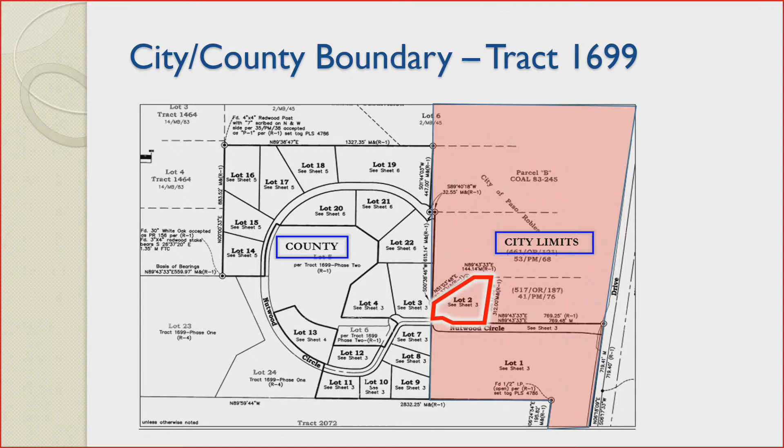So the portion that's in city limits. Commissioner Covarrubias, Warren Frace: Nutwood Circle, that property is owned by the owner of Lot 1 to the south, which has been split into two. It's not shown on this map that way. Do you have the correct exhibit there, Darren? Just so we can see... yeah, go back. That one will work. Okay, so the parcel to the south that's closest to Theater Drive owns Nutwood Circle.

So without a road maintenance agreement or any other agreements in place, the property owner would be ultimately responsible for the road maintenance.

Got it, I appreciate that clarity, Warren. Thank you very much. Last question, I guess, for anybody in staff: have we had any kind of scenario like this in the past within our city where we have a city/county road maintenance issue? Is anybody aware of anything like this previously?

There's a number of areas in town where the streets weren't originally accepted by the city for maintenance, or they're kind of straddling city and county lines. So it's fairly common throughout the town in those conditions to have concerns and issues with long-term maintenance. Okay, I have no other questions. Thank you, guys. Thank you, Commissioner Covarrubias.

Commissioner Davis, questions? Sherry, Darren, correct me if I'm wrong. I really want to see this project go forward, but I'm trying to work through some things. Am I correct that with Mr. Brown putting in infrastructure, those others will benefit from that? I don't know what the cost sharing is, but going first, there's some benefit to the other parcel owners.

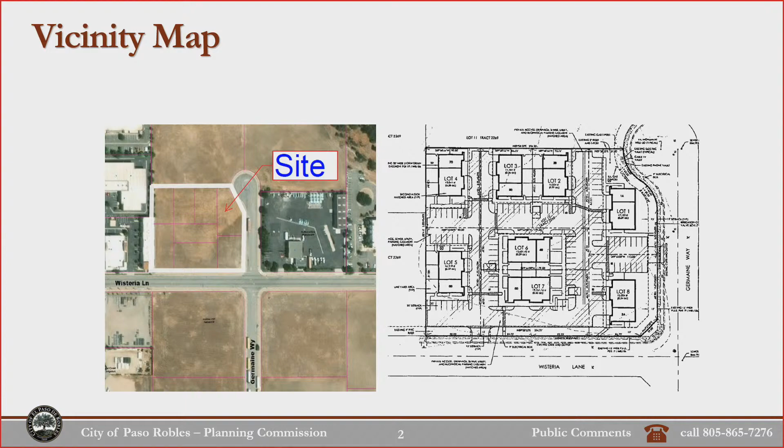No development ever occurred. So when this subdivision went through tract 2269, the streets were put in, the curb, gutters and sidewalks, the utilities were stubbed out. So this is a ready to build on lot. This project never went forward. Again, this is showing the project that was proposed and approved by the Planning Commission back in 2007.

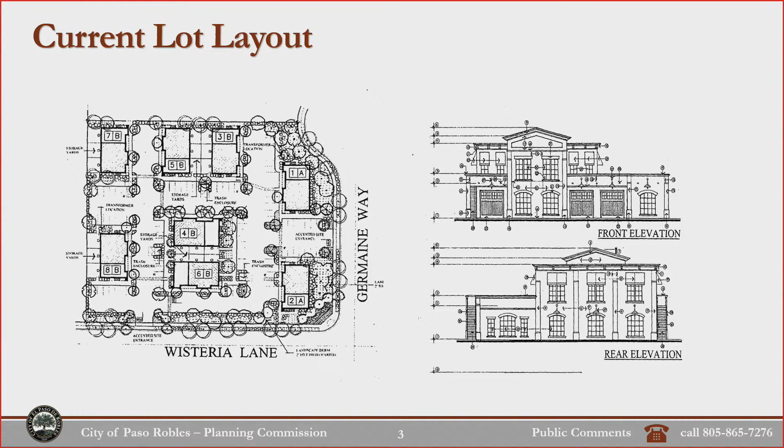So for the Planning Commission's review tonight, we're looking at adopting a new tentative tract map that would reduce the number of lots from 8 to 6. We're looking for a development plan for parcel 1. Mr. Thorndike has a building design that is included in the review tonight that he would like to get approved so that he can move forward with the building of a building on parcel 1.

The intent is to approve the development plan over all 6 lots, kind of a master development plan. There's some design guidelines that the applicant has provided to help guide the development of the other 5 lots in the future as they are sold and as developers propose plans for those lots. So the designs here, the site planning is showing a conceptual building footprint for the lots that could work.

The way that this development is set up, the conditions of approval would be that those lots 2 through 6 would come back, go through a site plan review at the DRC level where the specific placement, parking, use, all of that would be determined at that time. But they would be limited to what they could do on the size based on that property. And we can talk about that a little more as when we get to the site plan.

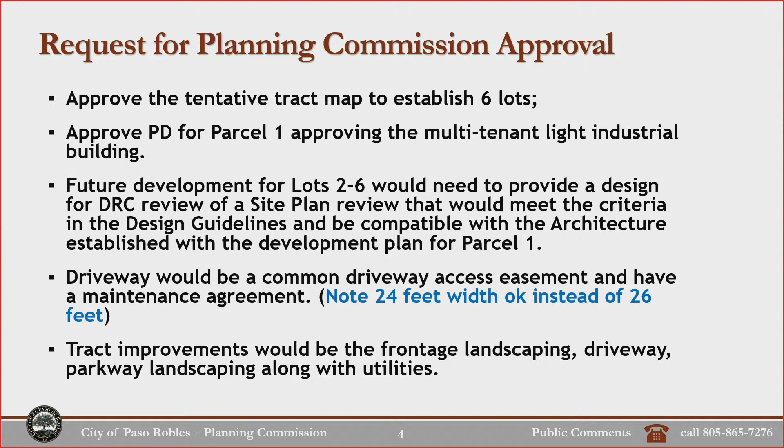There's been questions as this project has gone forward through DRC about how these properties could change, how the site plans could change for the parcel. It is possible that things could change on each of these lots, which would be handled through site plan review. But we know we have a business park, a planned industrial type zoning that allows certain types of uses. What's shown here is more of a standard light industrial warehouse type use.

If there was a situation where we got, let's say, maybe a little delicatessen or some kind of eating or coffee establishment, that is something that is permitted in the zone. That is something that is encouraged, to provide those types of accessory uses to the employees in the area that they could walk to and get those types of things. So we do encourage that.

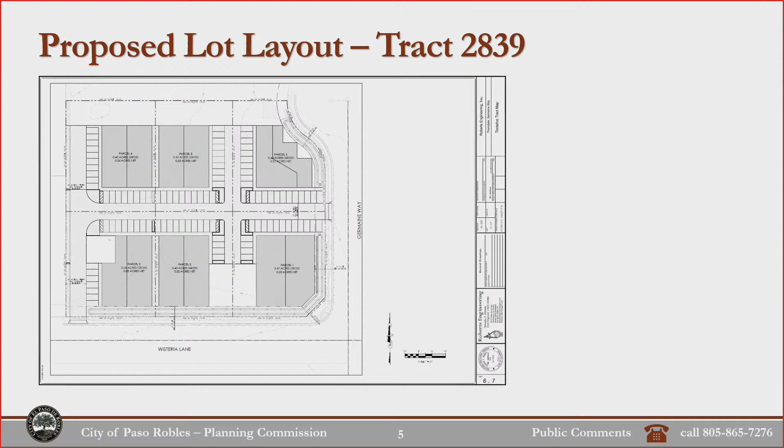So the master development plan shows the setbacks, 15-foot setbacks along the roads. It's showing that the setback area will be landscaped. Some of these setback areas are proposed to be detention basins. We do have a landscape plan that shows how these areas would be landscaped.

Prior to recording the map to create the 6 lots, the improvements that would be completed include completing this interior driveway through and out, establishing the perimeter landscaping and detention for the subdivision, and utilities that would come down the road and then be stubbed out for these lots. That would be phase 1, the requirements for recording the map.

And then Mr. Thorndike is wanting to build this building here. These other establishments, these other lots, would come in as they're sold and folks wanted to propose to build on them. So those would come in as needed, but driveways and utilities would be established.

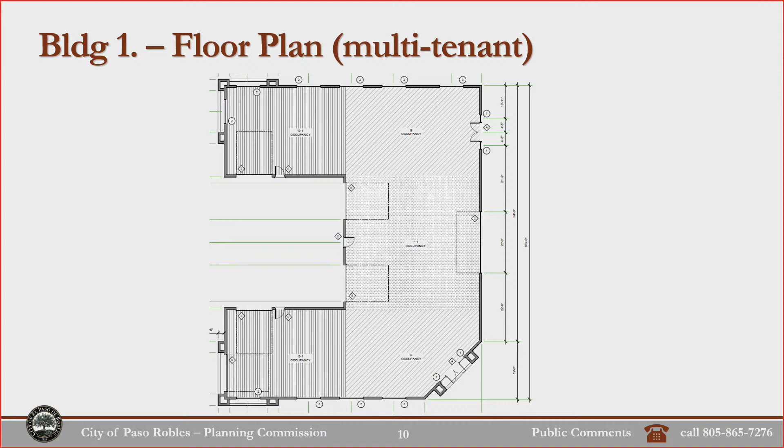Here's some other views of the other sides, and a floor plan showing how other areas could be divided up into tenant spaces—either multiple users with less square footage each, or fewer users with more square footage.

Another thing to mention is this project has existing curb, gutter, and sidewalk. There's a parkway situation, and the phase 1 subdivision improvements would include landscaping those parkways with the project as well.

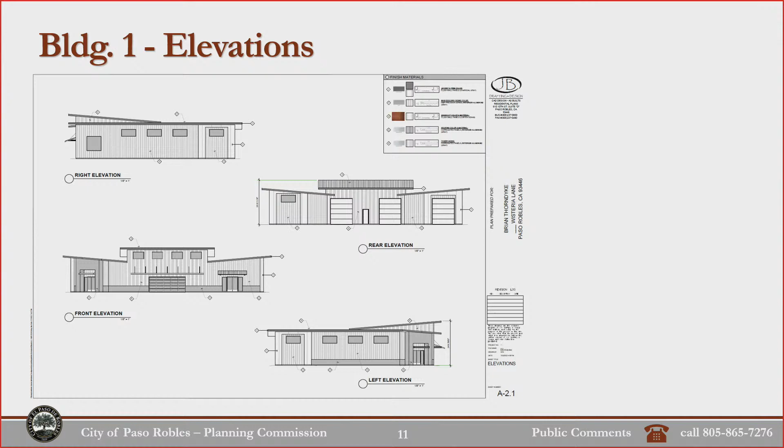Each individual site will have some landscaping, but it's going to be pretty minimal and not a lot to be seen from the public right of way. But the intent would be there's a plant palette in the design guidelines, and it would correspond as each of those lots develop, and DRC would see that as it comes forward.

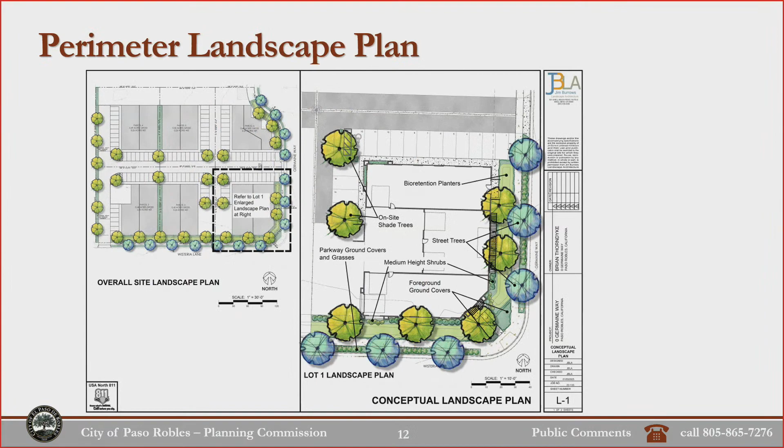Okay, and the beginning part of your answer kind of came to my next question. For clarification, my understanding was that on lot 1, the base area—if you look at this page, the base area—the trucks would back into an alcove kind of area, so you wouldn't see the area where the trucks will be backing into for the loading bays. Is that correct? That's correct. This would have a 6-foot fence with a 15-foot landscape setback in front of it along the road. It's showing a design where access could come back for deliveries into this area, where there's a roll door and trucks would come in, do kind of a 3-point turn and come back. I think the intent is these would be more local type uses, more of a small van-type truck, not large trucks.

Could this design seem to be done more efficiently with doors directly out? I think so, but this is kind of what the applicant's thinking. Yeah, no, I can appreciate that. And I thank you for explaining it, because when you look at it from the overview, it's hard to see that loading bay area. But my concern too was the size of trucks pulling in and then backing all the way into that area. It looks to me like with the base area, maybe there's enough turnaround space there. I don't know. Okay, thanks for explaining that, Darren.

The only other question I had for you was just clarification. You had it at, it was written up as 26 foot for the entrance, right? Fire department requires 20 and zoning code requires 24. Correct. So if you look at page 105...

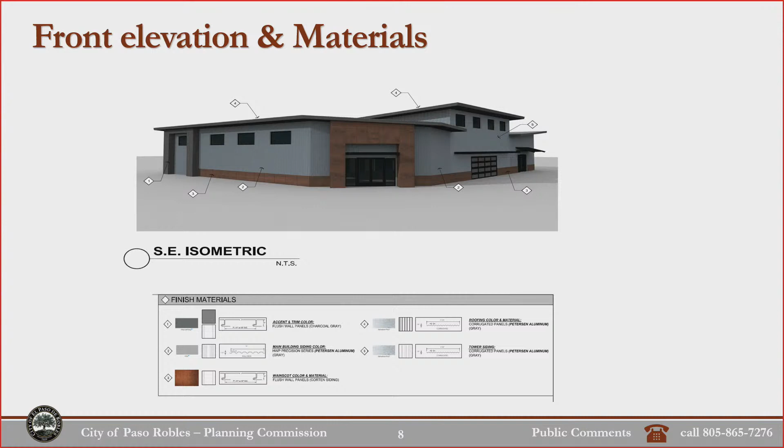I have a concern about storage being in front of anything facing Wisteria or Germain. And I don't really think the answer is having even a higher wall. I mean, I don't think you can put hardly anything behind a 4-foot or 6-foot wall along a road. I'm starting to not feel comfortable with this, and having an 8-foot wall is not acceptable because that really is, I don't know how to characterize that. It's just not something I would ever think would be a good idea. So that's it for me.

Okay, thank you. Like other commissioners, I'll have some comments on architecture, but I'll reserve those for the comments section of our discussion. I do have a couple of quick questions.

That graphic will serve a purpose, I think, for discussion. Darren, if it's found that the uses in this first building require the roughly 15 or 16 spaces shown there in the gray, darker gray screened back area, how does that work? Let me ask you, what will be built? You mentioned the driveway, the parking that butts the driveway.

Then as we turn and come down towards Wisteria, there's a bay with what looks like half of a drive aisle. Will that half be constructed or will more be constructed? Because those aren't really accessible if half is built. You're talking about this area here? Yes, exactly.

And the question is, built with phase 1 or built with the building? The question is, if what's shown in gray is built with the phase 1 building or the first building on the lot, it's not a usable parking situation because there's not enough drive aisle to maneuver in. The plans would need to show the correct dimensions of parking spaces as well as the appropriate backup.

Paved? Right there, yes. What's the material there? I assume it's part of the access coming back into the truck doors. So we're talking about this area here. Yes, correct, and this area here.

Correct. There's not a key seemingly that I could see to the paving in those areas. Right, and I think the intent would be that there would be a paved area that would come in and then access this paved area.

And then this area would be storage area, but that might be a better question to clarify with the applicant. Okay, and we can do that in a second.

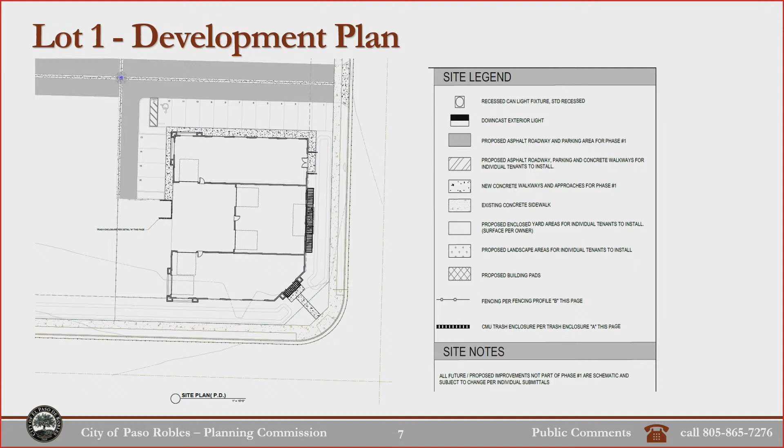On the adjacent lot, on the fence plan again that was up there a moment ago, there's a screened back pattern. If you can, there you go. Looks like it's—go back one. You had it there a moment ago.

That works. So the area that looks to me like a typical concrete pattern on a plan, the gray area on lot 3, what is that material? That's a storage area, but what is that material going to be? And I'm only asking because it's adjacent to lot 1.

Yeah, I think the intent is those storage areas would be a kind of base area, but you can clarify with the applicant. Okay, well, and or the next one that comes in. Right. Okay, and I'll come back to it again in comments later on. I think that's all I had that purely were questions at the moment.

Any other questions that have arisen from Commissioner Covarrubias or anybody seated at the table before we open the public hearing? Chairperson Kogler, this is Commissioner Covarrubias. Can I ask another question? Absolutely, go right ahead. Thank you, Darren.

Just so I'm clear, there's a discussion about the proposed possible building for parcel 1, or for lot 1, I guess. Does the applicant have a tenant in mind? I'm assuming this is being constructed to lease or rent.

Is there an applicant in mind or use already in mind? It's my understanding that there isn't, that they're building it to lease, but the applicants are here, and that'd be a good question to ask them. Okay, I would like that question answered, please.

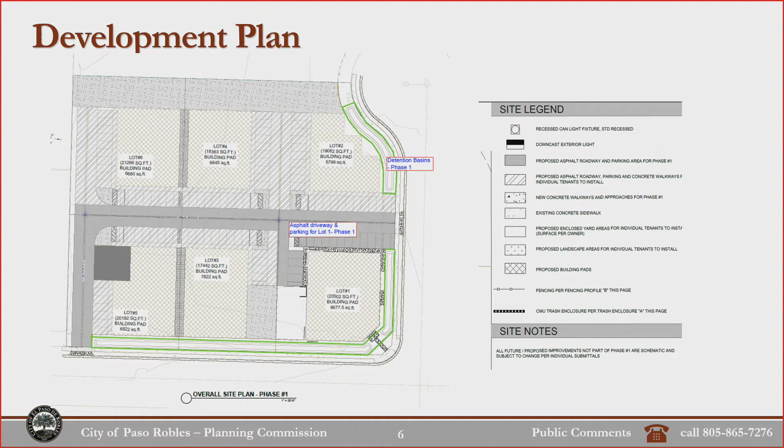So the fencing that runs to the north of the building to the left is aligned exactly at the edge of the building. In other words, it goes from the edge of the building and runs to the north. And the applicant is suggesting to utilize that fencing.

So it occurred to me, is that building a zero lot line building, or how far offset is it actually from the property line? Do we have any idea? There's a building along here. It's very close. I believe it's close to being on the property line.

Pretty much. That's what this gap here is shown, and that's where this area is landscaped. And then this fencing picks up at the corner of that building and goes up, because this is a parking area on the other side.

So, because the thought occurred to me, I was just kind of curious where the property line actually was from the building to the west. Is that some of this that was being, in essence, included in this project actually belong to the property on the western side?

No, I think what's being shown is that the property line is at the building. This project is pretty much on its side, zero lot line. Correct. Okay, that answers the question. Yeah, thank you. This project is not doing work off-site.

Thank you. Okay, we may have some subsequent questions as a group for various parties, but I think at this point in time, it would behoove us to open the public hearing and see if there's public comments on this development proposal. Or is there anybody in the room who would like to speak to this? And if so, please approach the podium and provide your name and address. Don't see any at the moment, but we'll come back to that in a minute.

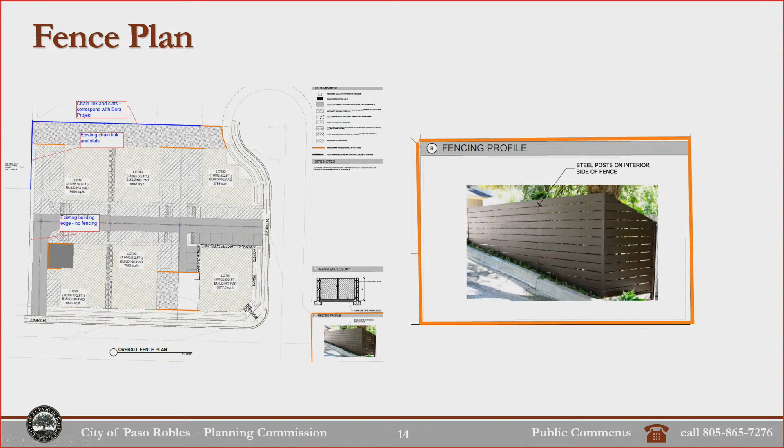Okay, this is the 1 minute warning. We said 9:15, we're coming back in 1 minute. That's what I'm saying, figure it out. Appreciate the small one.

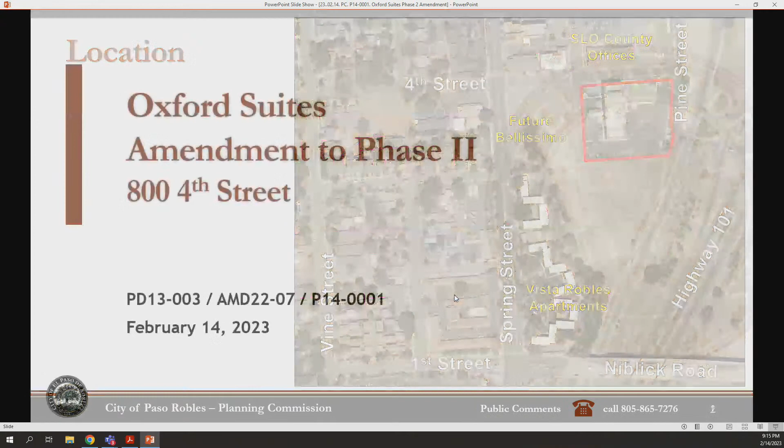We are now moving into public hearing number 3 for the evening, which is Oxford Suites Phase 2, AMD 22-07, PD 13-003, P14-0001. Property is located at 800 4th Street, APN 009-291-022. The applicant is Matisse, I think, for Oxford Suites. Do we have a staff report, please?

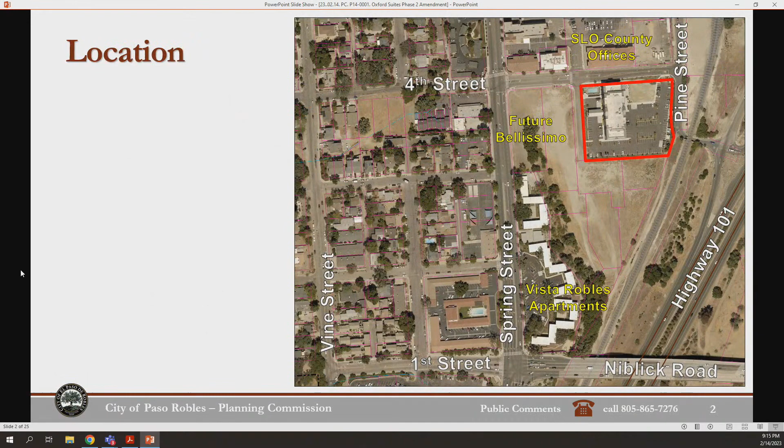Thank you, Chairperson Kogler. This is Katie Banister, Associate Planner, and I apologize for not being able to join you in person this evening. I'm hoping my screen is showing for everybody. Wait a sec, Katie, are you doing a screen share? Yes. Okay, hang on a sec, they're seeing my screen, let me get you up. It looks like Katie's, but it's not.

All right, go ahead, Katie. So as Mr. Kogler announced, this is an amendment to the second phase of the Oxford Suites Hotel located on... Katie, we lost your sound.

Yes, I'm here talking to myself. Okay, so this is the Oxford Suites. This is an amendment to phase 2 of the hotel.

So here is a map of the south end of the west side of town. You can see 1st Street at the bottom of the screen and 4th Street towards the north, towards the top of the screen. In the red box is the existing Oxford Suites Hotel.

Katie, you're muted again. There we go. I didn't mute myself that time, so I'm not sure what happened, but that was strange.

I'm not sure how much you heard. So the orange star shows where there's a pad that was graded with the original project in phase 1, which always anticipated a phase 2, which is what we're here to consider this evening.

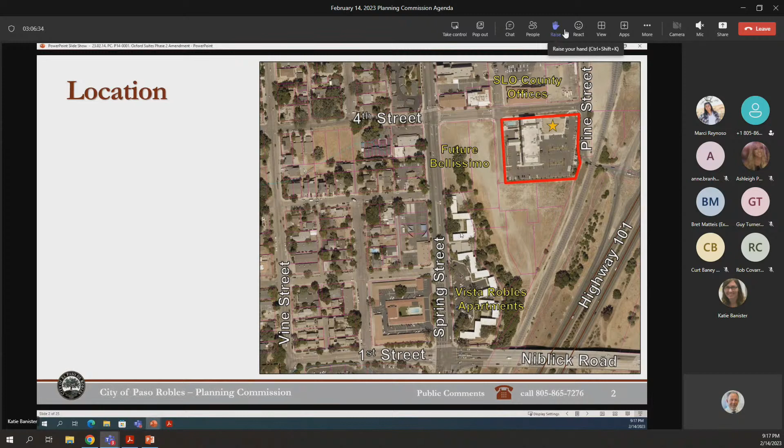At that time, phase 2 was proposed to have 24 guest rooms and an additional almost 3,500 square feet of meeting space. So today we're looking at an amendment to, instead of having the 3,500 square feet of meeting space, increase the number of guest rooms by 13 to 37 guest rooms. The completed project, if this amendment were approved, would have a total of 138 guest rooms and just the existing 1,848 square feet of meeting space.

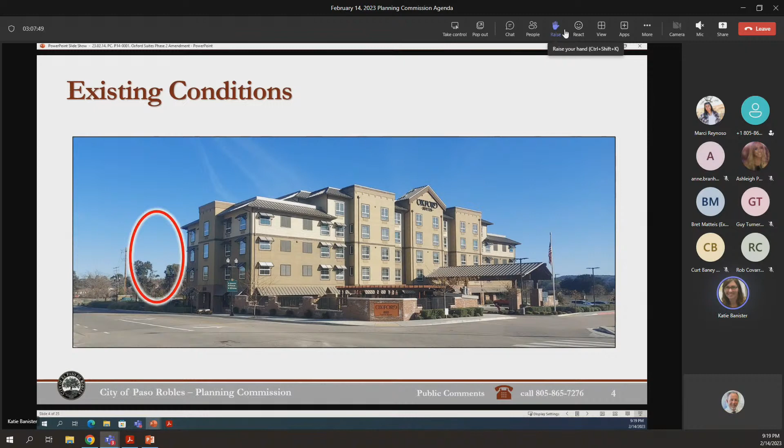So existing conditions, as I said, the first phase of the project is complete and has been in operation for a number of years. Here's a picture of the site from 4th Street. The red circle shows approximately where that new tower would be located.

Looking back at the approved phase 2, here in blue is the existing phase 1 that's been constructed. You can see it on the site plan, and then at the bottom we're looking from 4th Street towards the south. The blue is the constructed phase of the project, and in red is where that proposed phase 2 will be located.

So now we're looking at what is now proposed for the site plan. Again, similar to what was approved, shown in red in that same building pad, a new building is proposed.

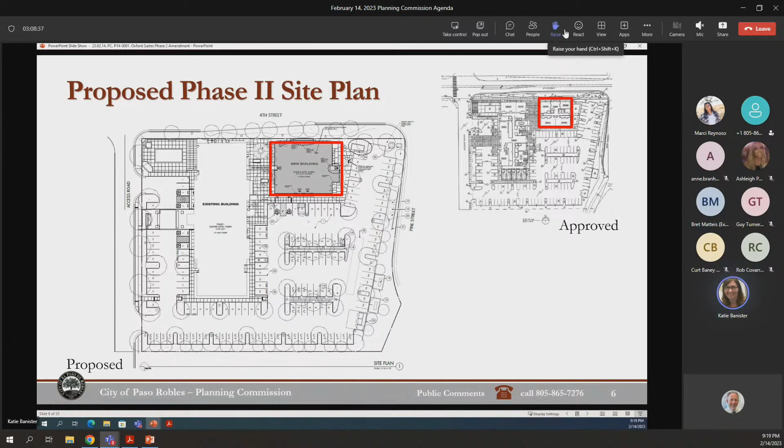So existing conditions, this is looking west on 4th Street. You can see the graded pad that's waiting for phase 2, and then the existing phase 1 building there in the background.

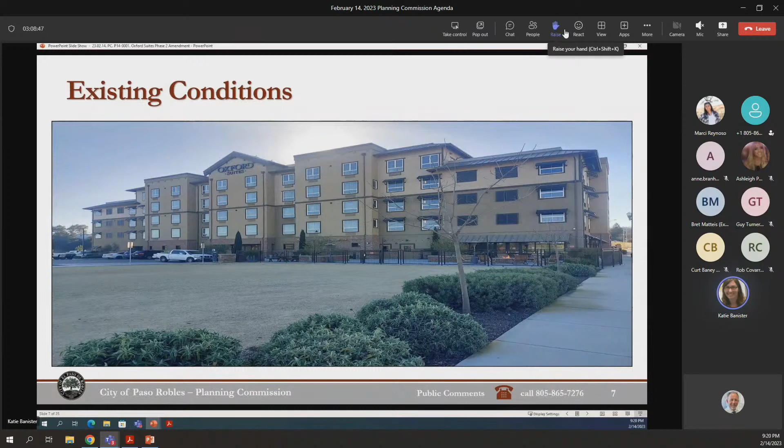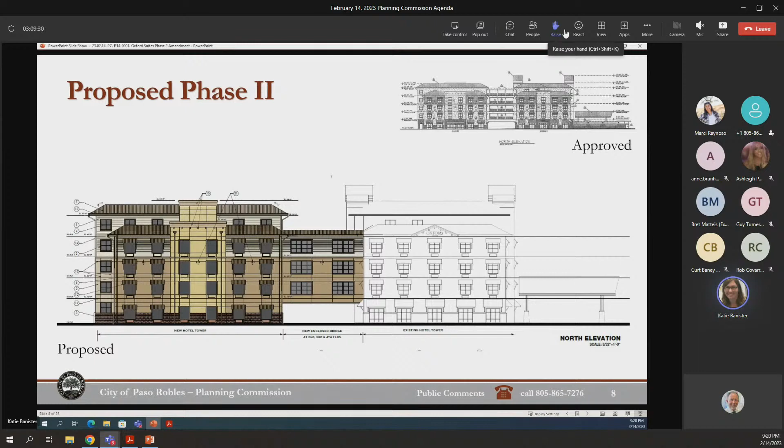Here we are looking at the north elevation, facing Niblick Street, Niblick Road. There was a question at the DRC about what would be under that bridge. There's an existing patio under that bridge, and my understanding is that it's intended to remain, just under or partially under that bridge. The bridge is relatively narrow.

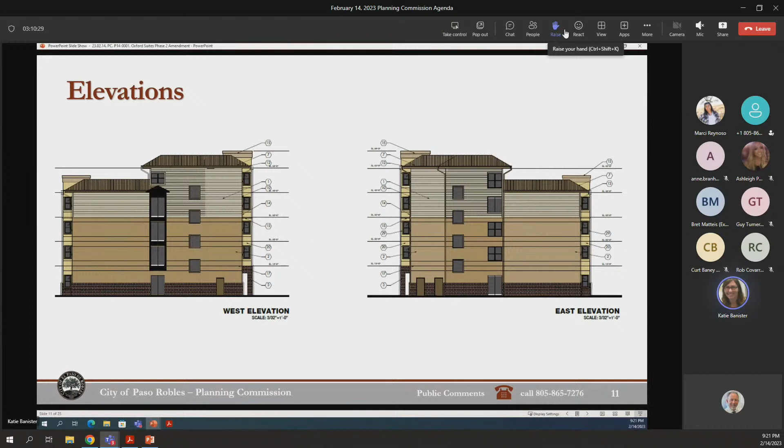Looking at the remaining elevations, the west elevation is what would be between the buildings, so it won't really be seen from offsite all that much. The east elevation is what would face Highway 101. Originally, this was shown to have an extra sign on it, which would have put two wall-facing signs facing Highway 101, and the DRC asked that one of them be removed. So the sign that's on the existing phase 1 of the building will remain, and no new signage is proposed on this second phase tower.

Next, moving on to parking. The parking for a hotel in the Uptown Town Center specific plan in the TC2 zone is to provide one parking space per guest room, and then one parking space for each employee on the largest shift. In addition, any accessory uses that are open to the public are meant to be parked at a 1 to 1,200 square foot rate.

So at the completion of this hotel, there would be 138 rooms. We have some new parking analysis that was provided today in an addendum to the agenda that shows that on the largest shift, there are 10 employees, and the applicant reports that the meeting spaces in the hotel today are not open to the public - those are just for guests of the hotel. If those were open to the public, they would still have a relatively low parking requirement of just 2 spaces.

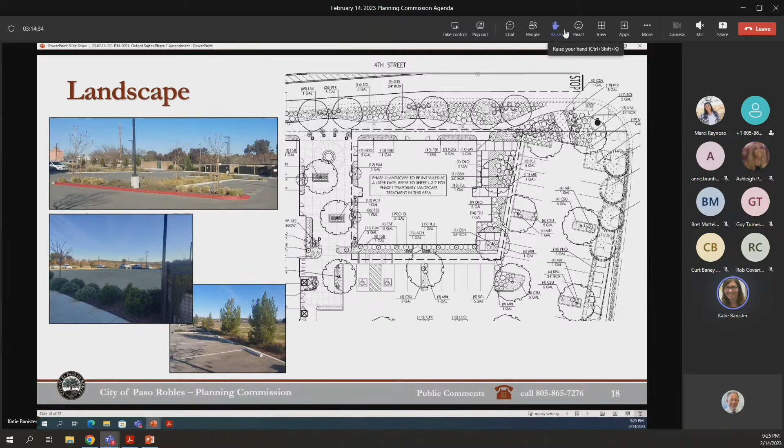This is the landscape plan that was included with the original approvals, and so there are some conditions of approval that would require that landscaping to be maintained as the project, as Phase 2 goes forward.

There's one area where the landscaping has just fallen into a little bit of disrepair along Pine Street. It's understandable with our recent rains, but there's also a condition of approval that would require the erosion control measures just to be maintained a bit better on Pine Street before we final the permit for Phase 2.

In addition, the city engineer would like to see the sight distance at the corner of 4th and Pine Streets addressed, and here's a picture of that intersection. And so there's also a condition of approval that would require that.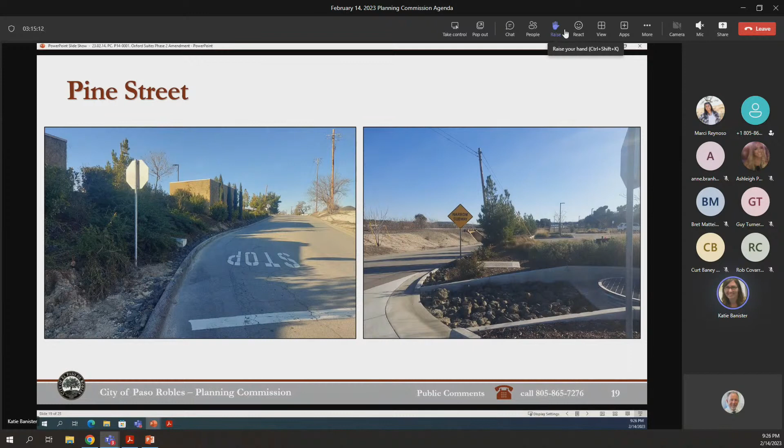So getting into those conditions of approval, first of all, all the conditions in the original approval of the project would remain in effect. Those were approved back in 2014 by the Planning Commission. In addition, there's conditions related to screening rooftop equipment, how many signs can face Highway 101.

And here's our landscape conditions, that any landscape that's damaged during construction would be replaced. The erosion control on Pine Street would be addressed. And then one thing, the landscape areas really could use a new layer of mulch. And so that's a condition there before Phase 2 is complete. And then, as I said, to improve the site distance at the corner of 4th and Pine Streets.

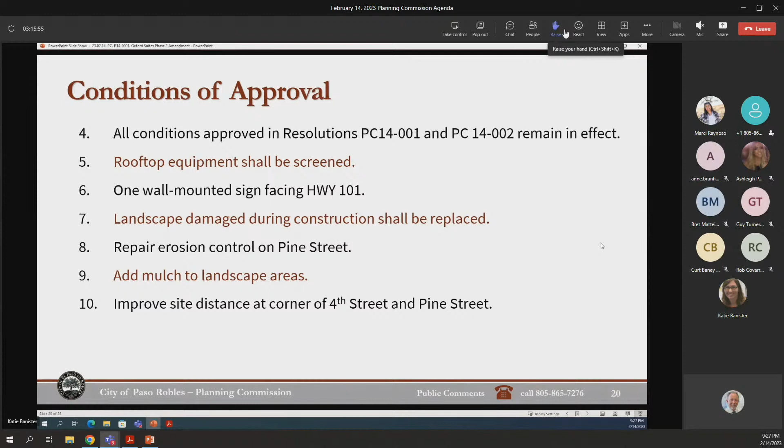In order to approve this amendment to the development plan, the Planning Commission would need to make a list of findings. You would need to find that the project is consistent with all the goals and policies of the many plans and codes and standards we have here in the city. You would need to find that the project won't be detrimental to the neighborhood, that it accommodates the aesthetic quality of the city as a whole, that the project is compatible with the surrounding uses, and also that it's compatible with our existing scenic and environmental resources we have here in Paso Robles.

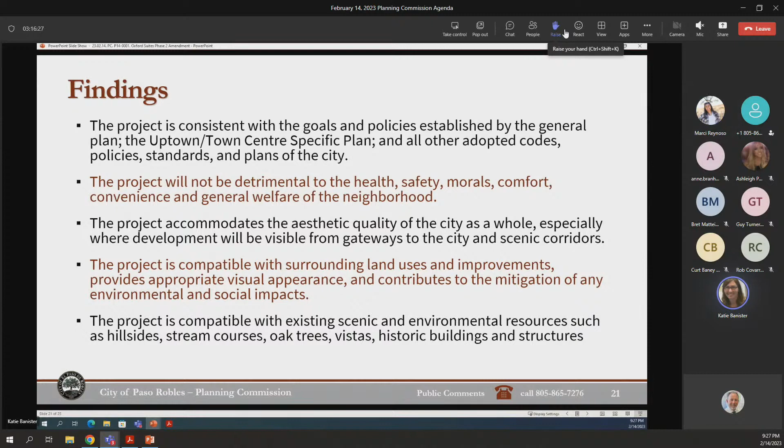This project, the impacts of this amended project are consistent with the impacts that were anticipated by the mitigated negative declaration that was approved for the project back in 2014. There's some analysis in your staff report that goes into vehicle miles traveled, which would be one of the bigger changes to CEQA since this project was approved. Projects that are located within a half mile of our train station are exempt from that vehicle miles traveled analysis.

The Planning Commission does have options. The first would be to adopt the draft resolution provided to approve the amendment to the development plan for the Oxford Suites Hotel. You could amend and adopt the draft resolution. You could refer the project back to staff or the DRC for additional analysis, or you could deny the project based on a determination that the project doesn't meet one or more of the required findings. The original approval for Phase 2 would still be in effect under that scenario. That approval is not null and void.

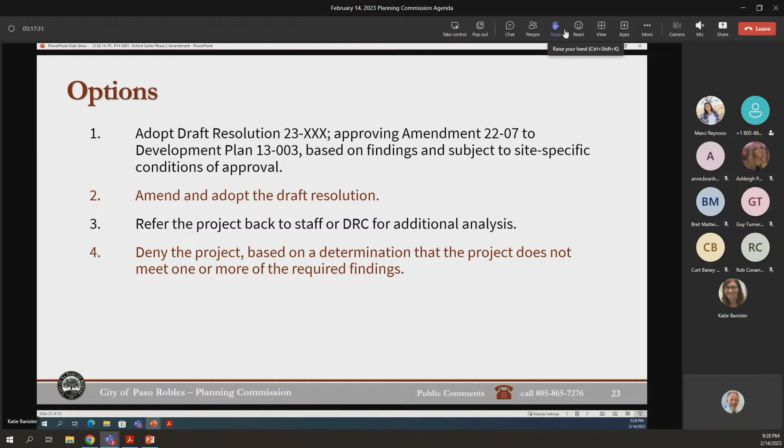Staff's recommendation is to approve the project by adopting the draft resolution that's provided. And that concludes my report.

I welcome your questions. And we do have both the architect and Mr. Matteis from Oxford Suites with us this evening to answer your questions as well. Okay, thank you, Katie. Let me see if there's any immediate questions from commissioners, and otherwise we'll hear from the applicant and then move into subsequent questions. Anything right off the bat? Seeing none in chambers, Commissioner Covarrubias, any initial questions?

No, I'll hold off for now. Okay, very good. Then I'll ask the applicant or representative if they have comments they would like to make.

Yes. Please go ahead. Identify yourself if you would. Yes, sir, this is Bret Matteis. 800 4th Street is the project I'm representing.

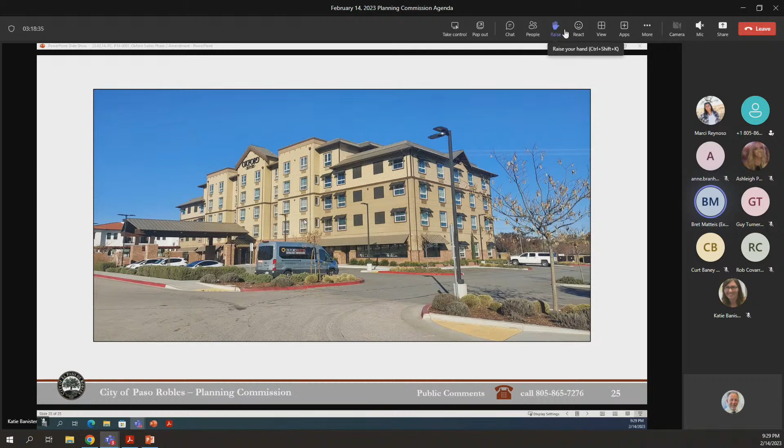Thank you, everybody, for taking your time to meet with us on this late Valentine's Day. And I hope that Katie did a great job of explaining our goals and desires with this new build.

We staff the project such that the quietest part of the day, when the guests are gone, that's when most of our staff is doing the work, doing the housekeeping, doing the maintenance, prepping for the evening and so forth. So we believe that what we have planned for is 6 additional parking stalls for our employee parking.

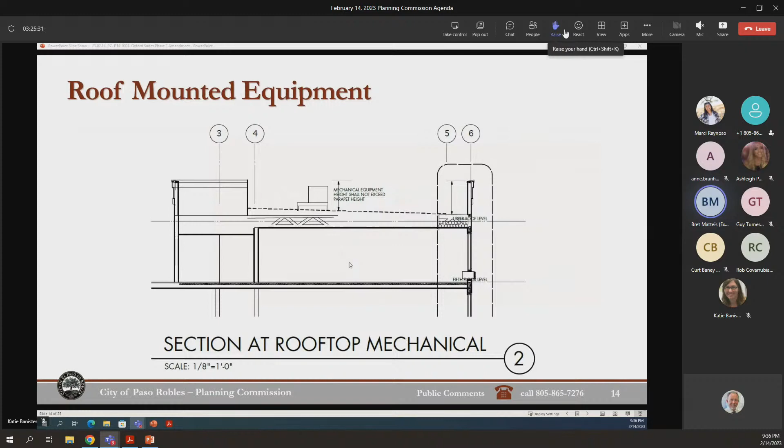On the roof deck, is there fencing around that roof deck? There is a screen wall, and code is 42 inches, so it'll be at least 42 inches tall.

And then you mentioned the bridge that's going to be connecting the two towers. Nothing underneath the bridge itself is changing. The existing arrangement or floor plan, I believe it's a small gathering area right now. That's not going to change? Correct. So there will remain access?

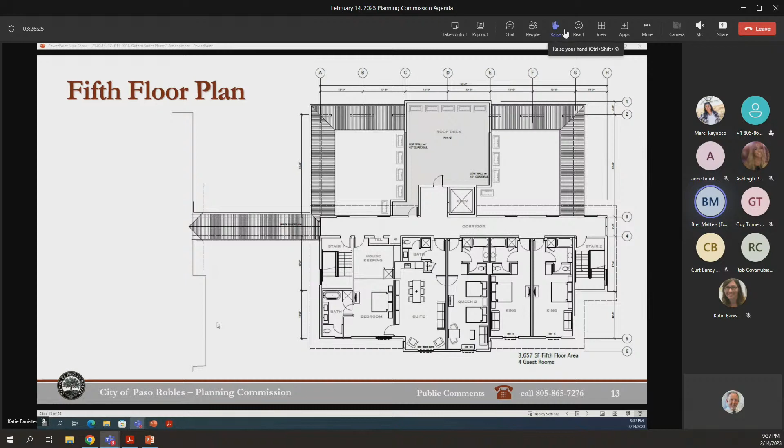Okay, all right, no other questions. There you go, thank you. All right, thank you. Commissioner Davis.

Yeah, Katie, and then probably a question for Mr. Matteis. Katie, could you describe where the square footage is coming from? Where's the conference room? And is that taking square footage from building phase 1? Explain how that works.

So no changes are proposed to phase one. The change would come in phase two. So originally there was meeting space proposed on the first floor of phase two. That would now be all hotel rooms, and so there would be no meeting space in phase two - it would be all guest rooms. So there's not an existing conference room being taken away.

Gotcha, so the concept of a conference room or meeting room. Then I guess either one of you could answer this question. I come from the tourism industry, and it's not really pertinent because it's not my business plan and not my purview tonight, but this town needs meeting rooms, and we've long tried to attract the business traveler. What was the thinking about taking away meeting rooms?

I think the strategy behind that is that we're set up for guest experience and not outside conferencing, and that is the grand plan with our marketing. Okay, thank you for your answer.

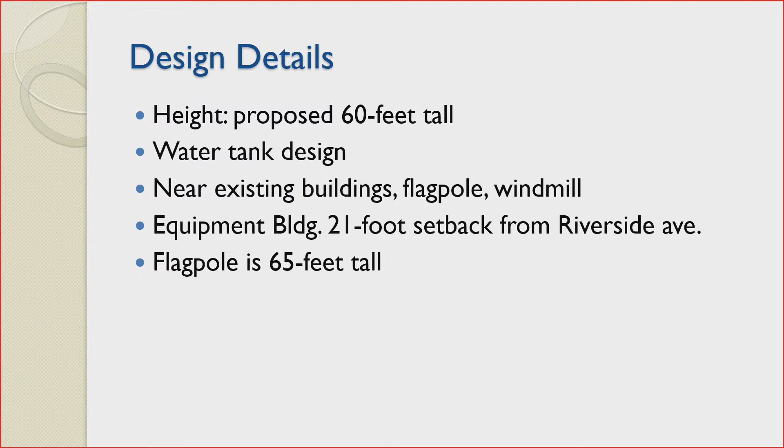So the project's designed to be 60 feet tall, a water tank design within the area where there's existing buildings, the flagpole, and the windmill. The equipment building would be approximately 20 feet back from Riverside Avenue. And just for scale purposes, the flagpole is 65 feet tall.

The DRC did review this project, and had some questions regarding the equipment building, signage, and landscaping. I've worked with Mr. Ambrose on this project. The equipment building was originally a shed-type roof with materials that really didn't match the project. It's been redesigned to have a gable-type roof, with siding, colors, and materials similar to the schoolhouse building. We'll show you some plans for that here quickly.

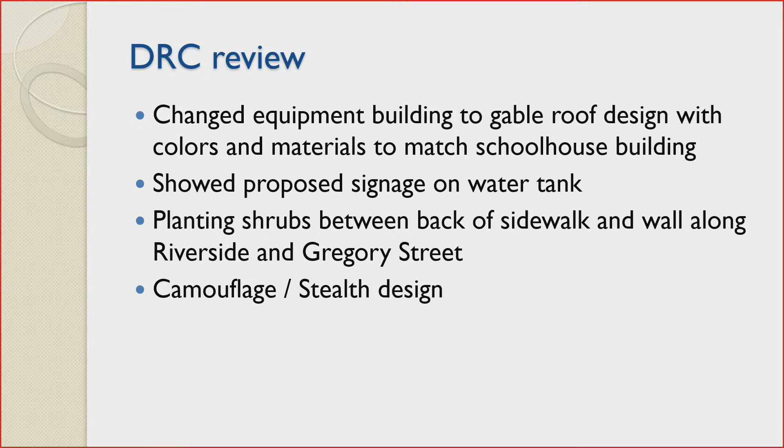They are proposing some signage on the water tank for the Pioneer Museum - individual metal letters applied to the tank, painted or powder coated as black letters, with no lighting proposed at this time. We also worked to get landscaping, some shrubs between the back of the sidewalk and that short existing wall along Riverside Avenue, turning the corner down Gregory Street, to get that dirt area spruced up with this project. This project would meet the intent of the ordinance for camouflaging the antennas.

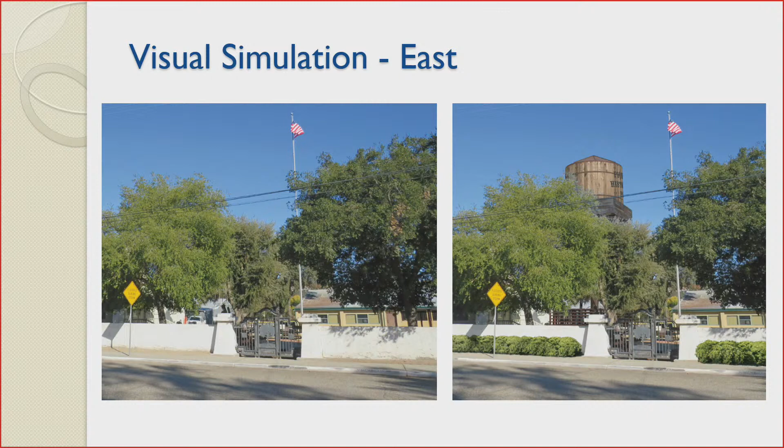Here are some photo simulations. On the left is existing, on the right is the proposal. This is standing at 21st and Riverside looking back south. You can see on the right-hand side the row of shrubs in front of the wall at the back of the sidewalk.

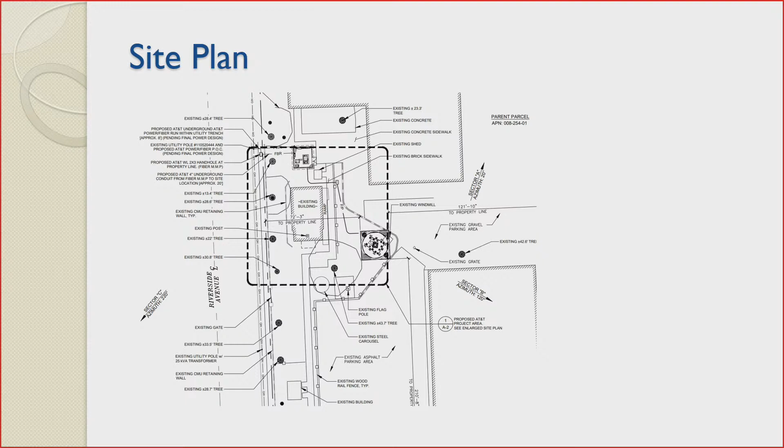This is a little hard to see, but it's showing a kind of site plan. This is the tower facility here, the building. This is the schoolhouse, and the equipment building is right here at the back of the schoolhouse. This is the wall along Riverside Avenue.

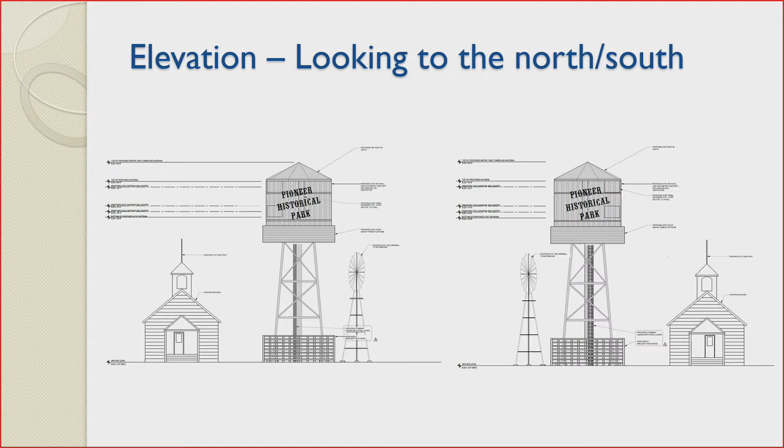Here are some elevations, starting to show the signage. If you look back at this building, there's some existing signage on the tractor area here, and the proposal is to use the same font, similar size and type of letter, up on the tank.

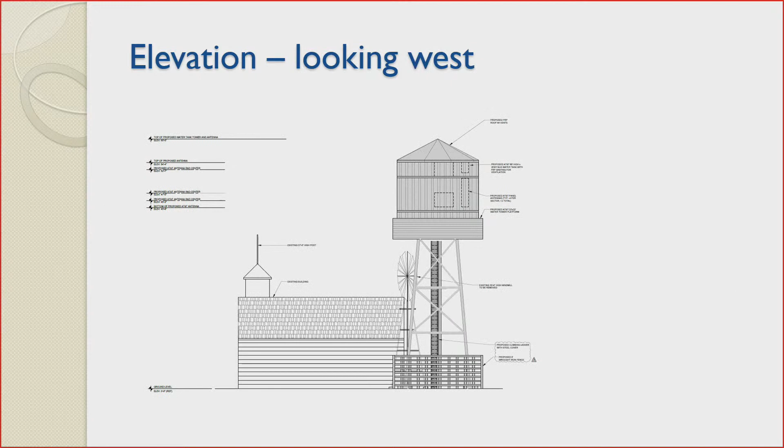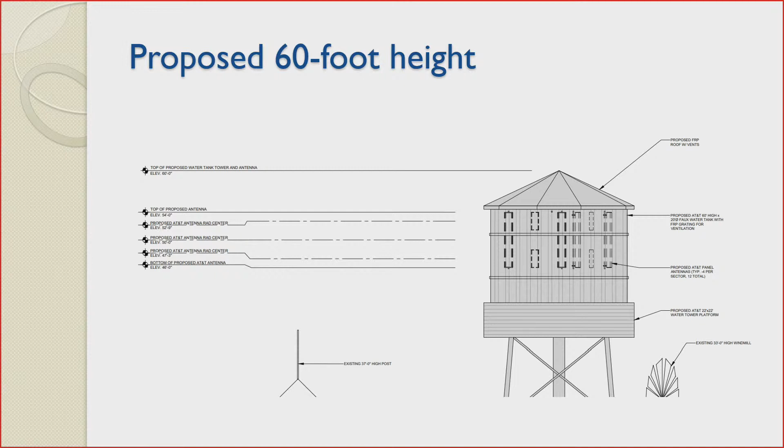More elevations. This indicates the tower, and the antennas themselves are located within the water tank itself. Then this is the equipment building, showing horizontal siding up to a point, an open area, and then the roof with composition shingles to match what's done on the schoolhouse.

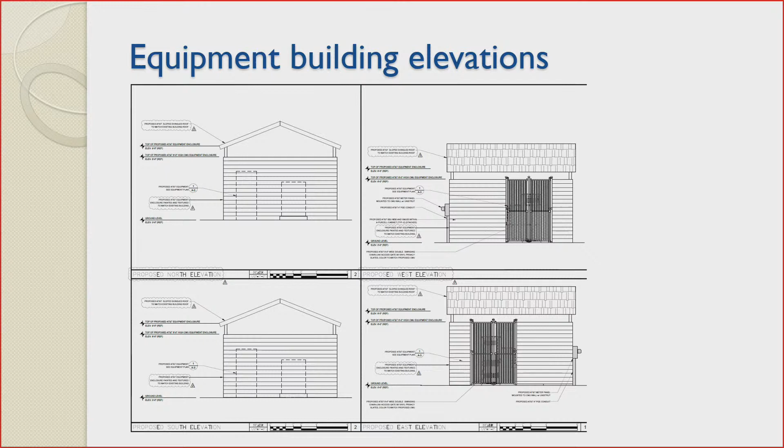They're showing some chain link and slat gates. Those are facing west, so those would be visible from Riverside Avenue. So I have a condition in here to do something more metal, wrought iron, similar to the other materials being used, instead of the chain link there.

So this is a request for the use permit for the Planning Commission to review. We've got conditions of approval. I believe I have a condition that talks about the final signage coming back to DRC, and any lighting would have to come back, but at this point they're not proposing any lighting for the signage. With that, I'd be happy to answer any questions.

Thank you, Darren. Is there anybody representing the applicant that would like to address the commission?

Good evening, Chairman, Commissioners. My name is Jerry Ambrose, I'm here on behalf of AT&T. I don't have anything to add to Darren's presentation. As he mentioned, we did our best to address the DRC comments, and we're asking for your approval as proposed. I'm here to answer any questions you may have.

Great, thank you for your comments, and thank you for sticking with us on what's a longer than average agenda for us.

We've talked on the phone a few times, never met in person. Paul Viborg, 2775 Santa Rita Road. I represent Pioneer Foundation, which represents Pioneer Museum, Pioneer Day Committee, and Jeansville Pump. It's a big plus for us, getting monthly income, good and bad years, so we can put it to good use. So I hope you approve this cell tower.

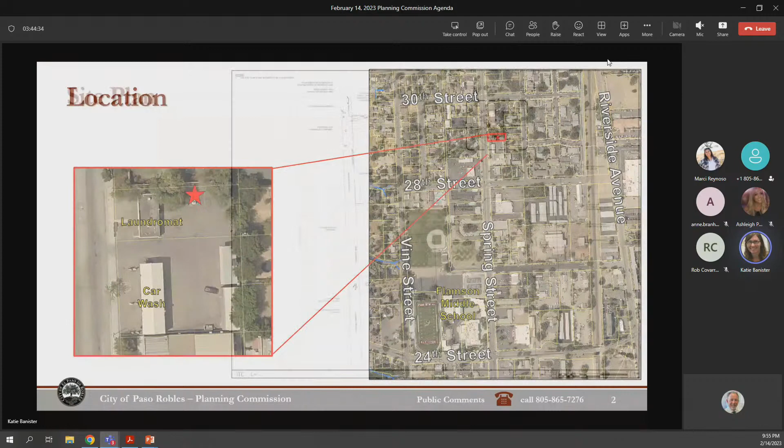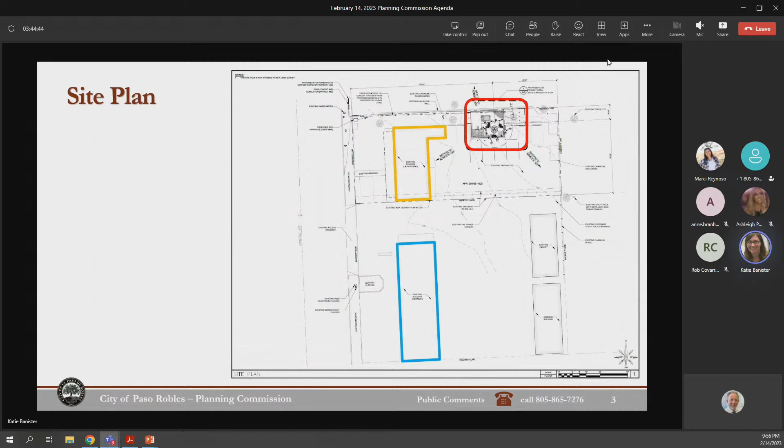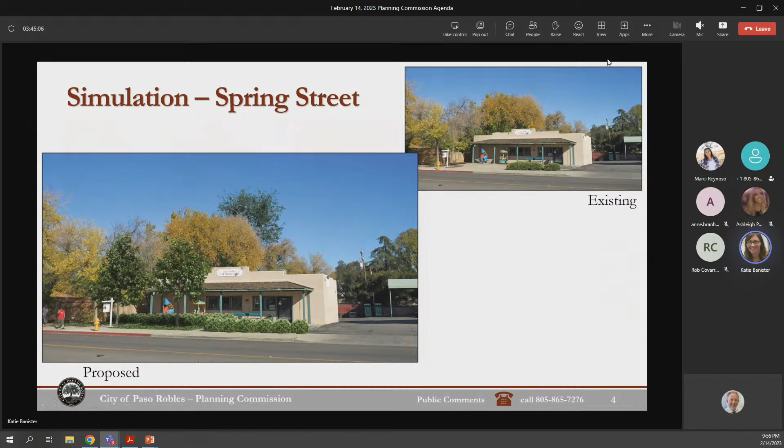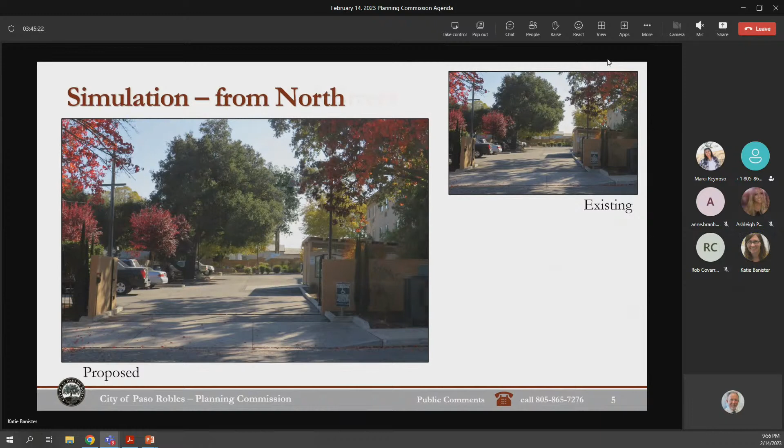From the north of the site, there's some apartments to the north of the project, and looking from their parking area, I think that would be from 30th Street, you can see the tower there that's on that property to the south. And then from Park Street, you would be able to see it over the houses there as well. And finally, from the parking lot, this is an image of what the tree would look like.

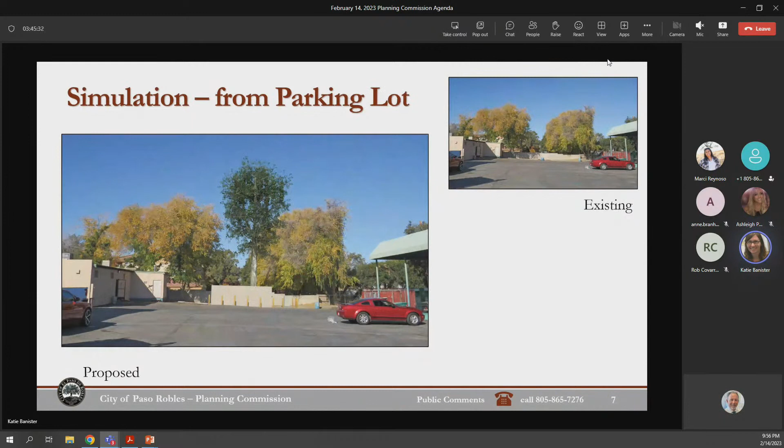So this is a proposed eucalyptus. It is proposed with a height exception for the zone. So the proposed tree would be 57 feet tall. The antennas are maxed out at 52 feet in height, but the branches would continue taller up to 57 feet.

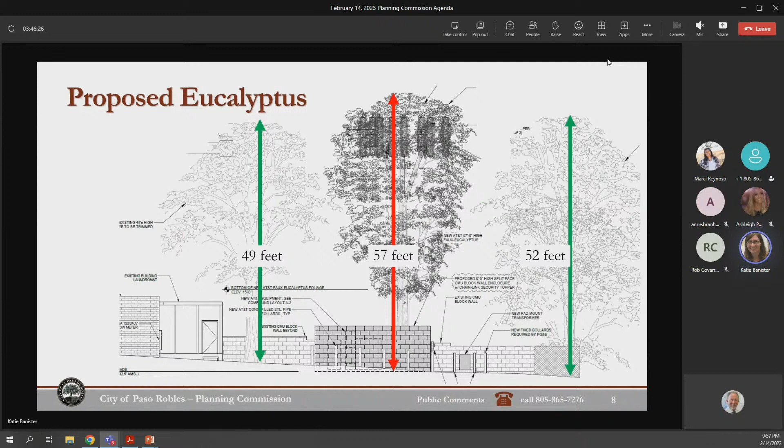There are some existing trees to either side of the faux tree. There's some real trees to the east, a 52-foot tall tree, and then to the west, there's a 49-foot tall tree. The applicant is proposing that those trees be trimmed to some degree. There's a condition of approval included in the draft resolution that would preclude them from trimming below 45 feet in height as a starting point, something to discuss to try to keep the adjacent trees somewhat similar in height to this tree, because it really does help to mask a tree when there's other trees nearby that are of similar height. The maximum height in the T4F zoning district is 36 feet, so there is a height exception being requested.

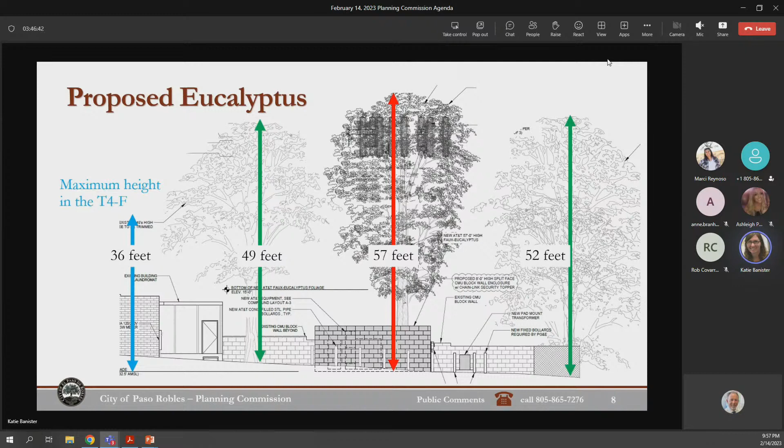So wireless communication facilities have some design requirements provided in the municipal code. They are meant to be integrated into functional facilities when that's possible. There are no functional facilities in the vicinity of this project, and so the tree is being proposed. Stealth design is required. It is meant to make the structure closely blend into the surrounding environment and to be minimally visible and to appear as if they're part of the existing landscape. So that's the intent of the tree that's proposed.

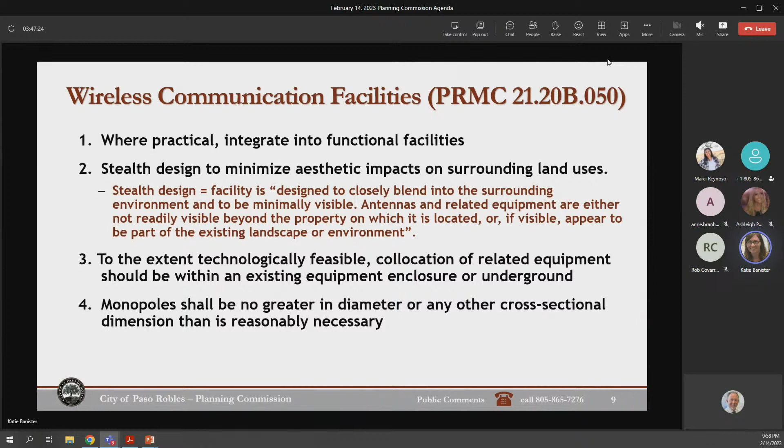And then there's some other standards. The monopole should not be greater in diameter and so forth. The tower needs to be located outside of building setbacks. It needs to adhere to the existing height limitations of the zone.

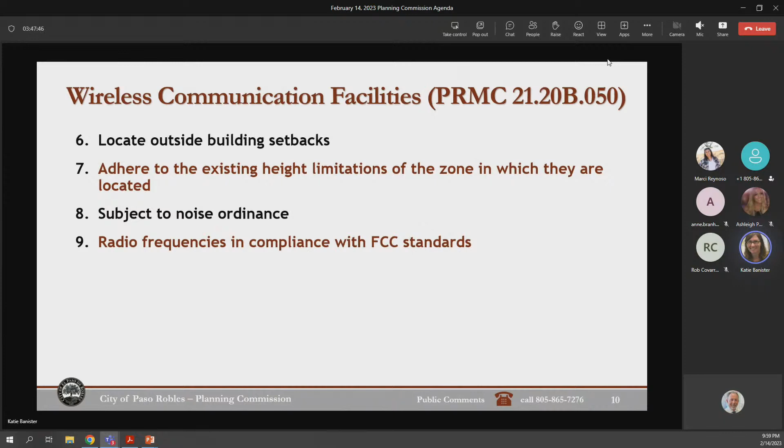The next screen explains what we can do to consider a height exception. The towers are subject to our noise ordinance, and they do have to have radio frequencies in compliance with FCC standards. The height that's proposed is 57 feet. 36 feet is what is allowed in the zone.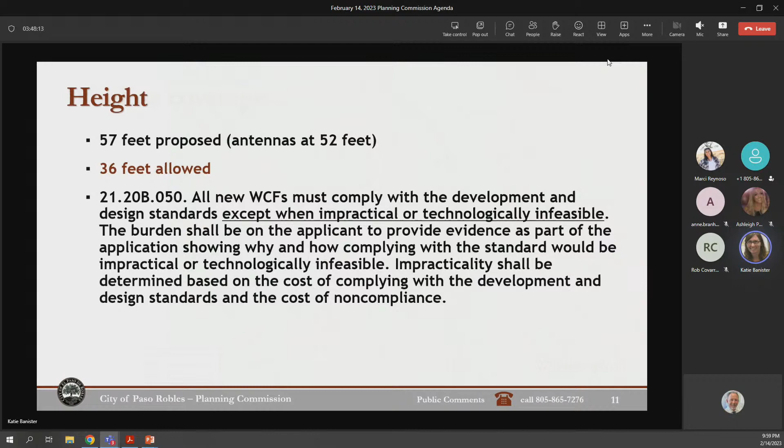The municipal code says that the facilities are meant to comply with the development standards except when it's impractical or technologically infeasible. The applicant has the burden of proving that it's technologically infeasible to do their project at a lower height. So to that end, the applicant has provided a series of maps that show what kind of wireless coverage they will achieve at different heights.

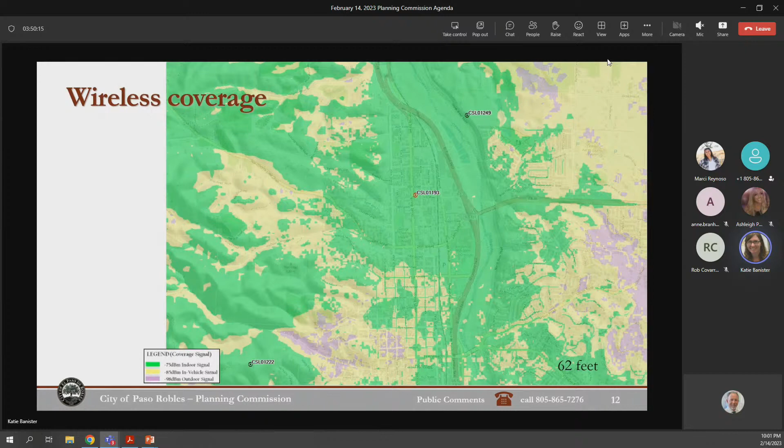And then at 62 feet, you get even more coverage. When the project first came in, it was proposed at 62 feet of height. The DRC definitely recommended a lower height, and so the applicant is now proposing 52 feet for the antennas. The branches would go a little taller to 57, but the 52 feet is what is under consideration this evening, unless the Planning Commission wants to provide alternative direction.

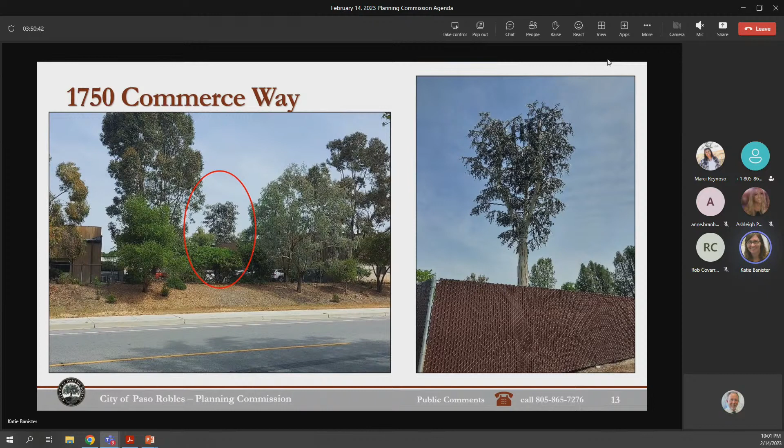There is a relatively successful eucalyptus tree in Paso Robles on Commerce Way. On the left, you see the tree from what would be Scott Street. I've put it in red just in case you can't tell. Up close on the right, you can see the tree. It's multi-branch. The branching is relatively good. It screens relatively well. Not a perfect tower, but it does do a good job if you're driving by, here.

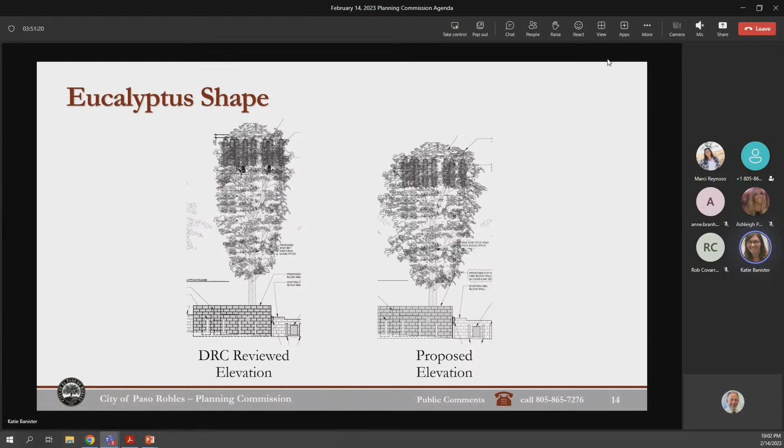There are some additional conditions of approval provided in the draft resolution to address the appearance of the eucalyptus tree. One is that the branches would be about 3 feet wider than the antenna equipment. One of the things we see on some of the existing trees that are masked as cell towers in town is that the branches just don't extend far enough beyond the antennas. In addition, the branches would need to project at least 5 feet over the tower.

That is shown in the drawings, but there you've got it in the conditions. There's a condition that there be at least 4 branches per foot in the branch portion of the tower in order to make sure there's enough branches to mask the equipment. Some conditions relate to providing varying colors, that the equipment, the leaves would be varying colors.

The wireless communication equipment should be clad with either foliage to match or painted a darker color. There are some conditions about the bark cladding, and that the trees not be trimmed below 45 feet in height unless an arborist determines they are a hazard, in order to keep the new faux tree looking more natural in the skyline.

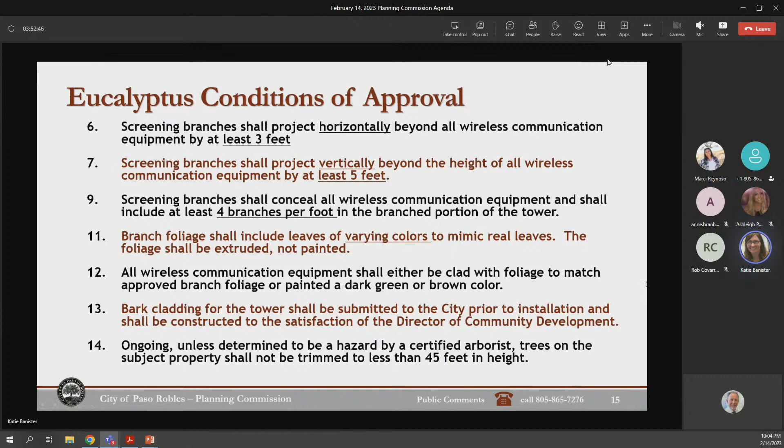A chain link security topper was added based on feedback from the Development Review Committee. They were concerned about folks using the enclosure to hide their belongings or to sleep in. There are some chain link fence access gates that face Spring Street. This might be something we want to discuss to make sure those gates have adequate screening from Spring, although the enclosure is behind the laundry building, so there's limited view from Spring Street.

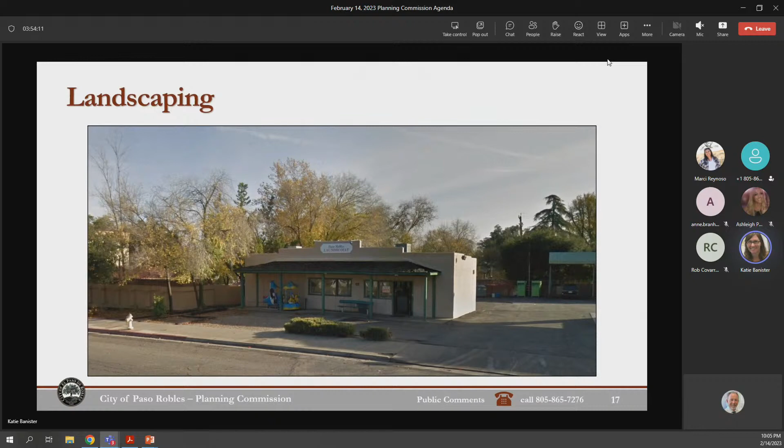The DRC did request that a landscape plan be provided. The laundromat building does not have any landscaping out front, or very minimal landscaping, so a landscape plan was requested. The plan proposed is pretty simple: just a couple of shrub species and some new street trees.

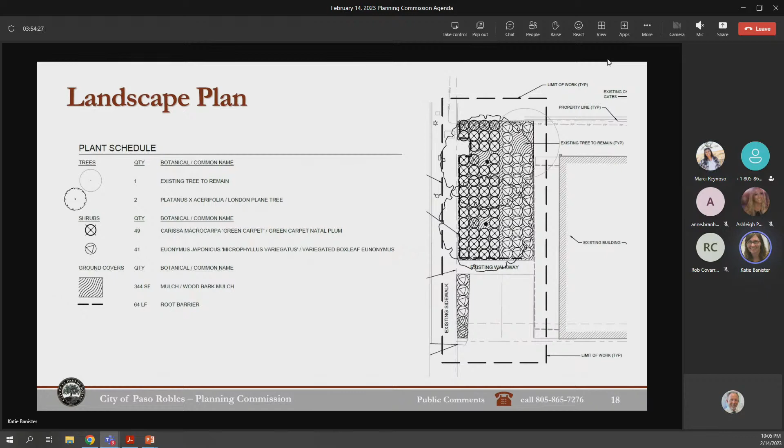In order to approve this project, the Planning Commission would need to make some findings similar to the findings we saw in other projects, basically that the project is not detrimental to the neighborhood, not detrimental to our efforts to revitalize downtown, and that it's compatible with all of the zoning ordinance requirements.

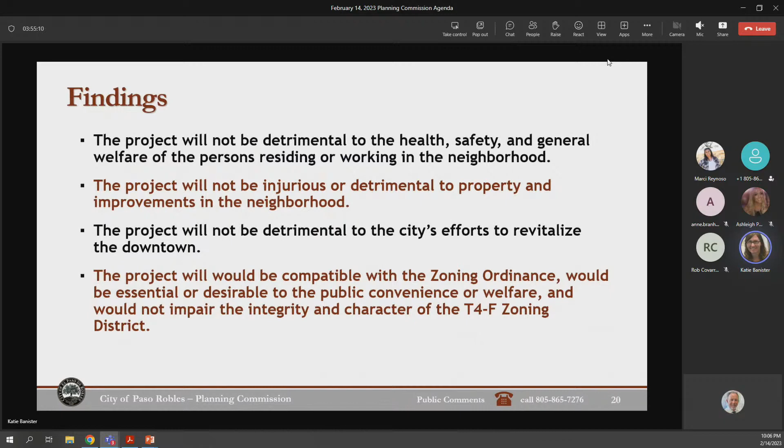In addition, there are some special findings that have to be made for wireless communication facilities, also included in the draft resolution: that the project complies with design and development standards, that it discourages projects from being located too close to residential uses, and that it has high quality stealthing design. This project is a freestanding cell tower, which is discouraged, but as I mentioned earlier, there really are no other facilities nearby that would be tall enough to house a cell tower in this area.

Staff is recommending that the project be determined to be categorically exempt from CEQA as a Class 3 exemption, which is for the construction of small structures, including accessory structures.

The Planning Commission has options. You could approve the draft resolution provided, which would approve the conditional use permit and find that the project is exempt from CEQA. You could amend and approve the draft resolution. You could refer the project back to staff or the DRC, or you could deny the project based on a determination that it does not meet one or more of the required findings.

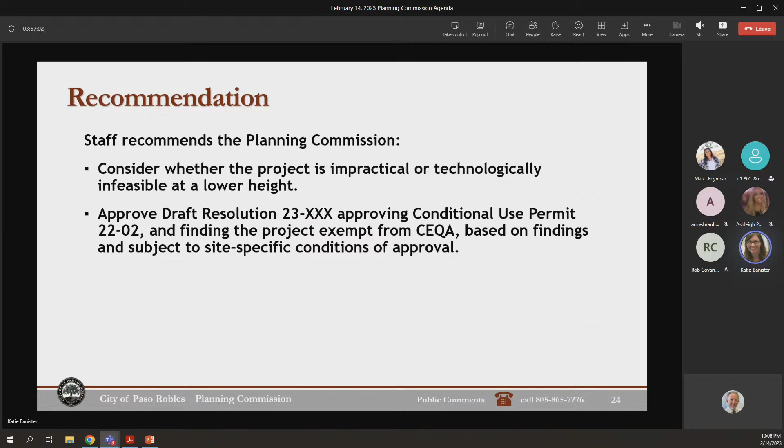Staff's recommendation is that the Planning Commission consider - I think the biggest question on this project is what is the appropriate height. It is a very tall structure proposed where there aren't many other tall structures in town. So an important consideration is whether this project is impractical or technologically infeasible at a lower height - does it need to be at 57 feet? If the Planning Commission can find that is the case, and that there are conditions requiring really high quality screening for this structure, the Commission could then approve the draft resolution approving the conditional use permit.

That does complete my staff report, and I welcome your questions. Thank you, Katie.

And the word of the day is euonymus, just in case you want to know.

So we've had a staff report. Any questions at this point, or should we let Mr. Ambrose come up and provide some commentary first? I think we're fine with that, if you'd like to approach us again and give us your thoughts.

Good evening again, Commissioners. Jerry Ambrose, here on behalf of AT&T. This project also went to DRC, and we had a number of items to address, which we feel we have addressed. As Katie mentioned, the original height was 66 feet. We were able to work with the engineers and bring down the total height to 57 feet, and the engineers were accepting of that lowered height. It still meets the objectives they need to meet for the network.

The DRC also wanted some landscaping, and we're proposing to completely landscape the front of that otherwise barren piece of land in front of the smaller building on the property. Katie also mentioned that the DRC or staff asked us to mimic that existing faux eucalyptus tree she showed on screen. We did reach out to that company, redesigned the tower, and that company is going to be the selected vendor to construct or engineer this tower. I'm here to answer any questions you may have.

Is it truly completely hidden from Spring by a building? No, I don't think it is. Let me get to the site plan again. So as you can see, there is a...

I was just going to say, while we're waiting for Katie, I did confirm that the eucalyptus on Commerce is 65 feet. So Mr. Ambrose was more correct on that.

Do you have a thought on this, Katie? That was the only thing that came up in the discussion that I was curious about, especially since we had talked about some better enclosures on the previous cell tower.

Yes, so you can see there is a short sight window as you drive by. If I understand correctly, Mr. Ambrose, please correct me if I'm wrong, I believe there's an existing fence at the back of the laundry, and I believe it's also chain link. So there would be a small sight window back towards the gates of the enclosure.

Yes, technically if you stopped and stood there and looked back in between, you could see it, but for the passerby, you wouldn't see it. Chairperson Kogler: I would concur. I drove by and even slowed down. It's very difficult to see past that edge. I'm perfectly satisfied with that response.

Okay, we have a motion on the floor, we have a second. Please call the roll. Commissioner Gibson? Aye. Commissioner Christensen? Aye. Commissioner Neal? Aye. Commissioner Jorgensen? Aye. Commissioner Davis? Aye. Commissioner Covarrubias? Aye. Chairperson Kogler? Aye. Motion passes 7-0. Thank you.

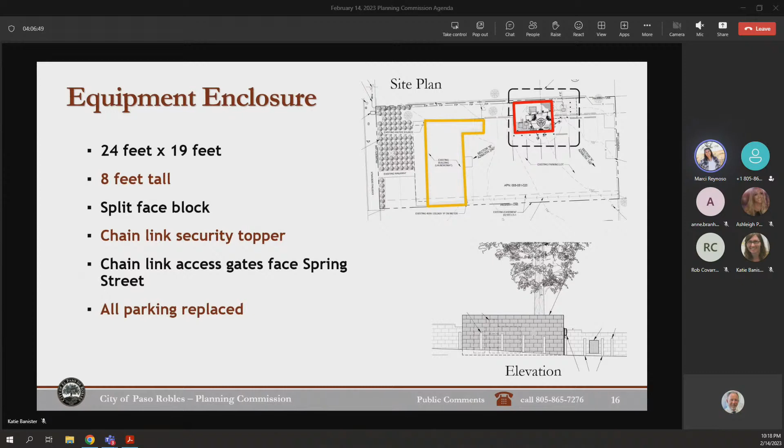Okay, we have a few more agenda items to wrap up. Any discussion items by staff? There are none. Okay, we like that. We don't have a consent calendar. There were no minutes in our packet for this evening, that works well with our timing this evening. Item J, other reports. The first is the Paso Robles Streetscape Ad Hoc Committee report.

We're still trying to schedule a follow-up meeting. Will you please reach out to us and ask what dates might work? Marci will be doing that. Perfect, thank you.

We have a Housing Constraints Opportunities Committee report. No report tonight. How about the DRC rotation schedule? That won't be finalized until we know the full complement of the commission. Are there any conflicts with what remains this month?

Hearing none, we'll move on to Planning Commissioner comments.

I'll start with Commissioner Covarrubias. Do you have comments? Just real quick, I wanted to thank everybody. We always thank staff, but I also want to thank my fellow commissioners. It's always amazing what I learn from each of you, and that occurred during our first review item tonight again, all the way up to the last minute. So thank you for that, and happy Valentine's Day, everybody.